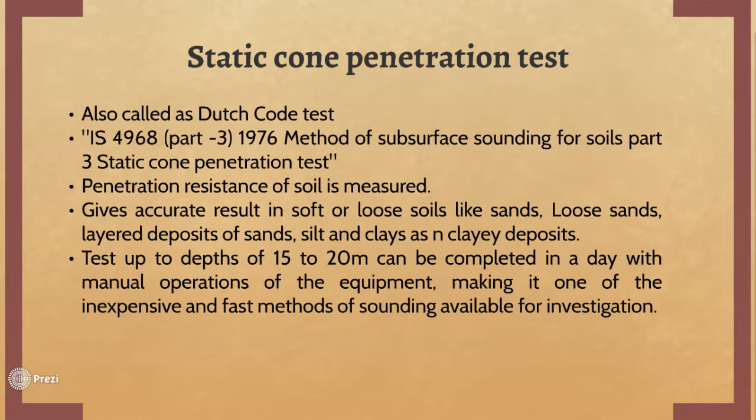The apparatus consists of steel cone, a friction jacket, sounding rod, mantle tube, a driving mechanism like a manual or automatic machine, and measuring equipment to measure soil resistance.

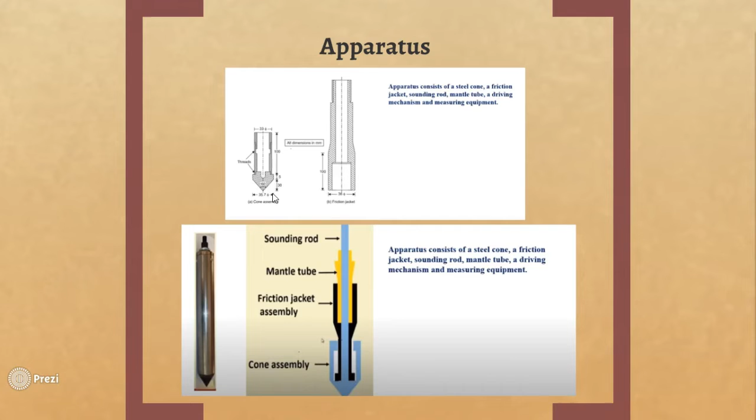The friction jacket shall be high carbon steel. Sounding rod is a steel rod of 15 mm diameter which can be extended with additional rods of 1 meter each in length. As the depth increases, the sounding rod length is increased accordingly. The mantle tube is a steel tube as a means of guidance for the sounding rod which goes through it. It should be 1 meter in length with flush coupling.

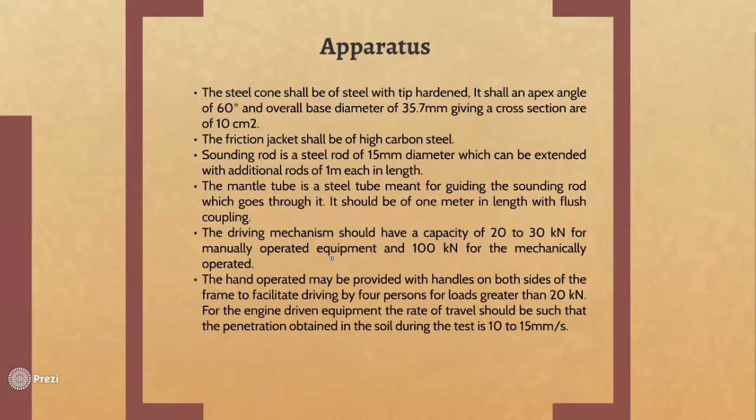Process. The test process for determining the static cone frictional resistance consists of pushing the cone alone through the soil strata to the depth to be tested. Then the cone and friction jacket and finally the entire assembly is pushed, and notice the respective resistance in the first two cases. The process is repeated at predetermined intervals. After reaching the deepest point of the investigation, the entire assembly should be extracted out of the soil.

The result of the test shall be represented as a graph of cone resistance with depth in meters. Small qc is equal to Qc upon Ac.

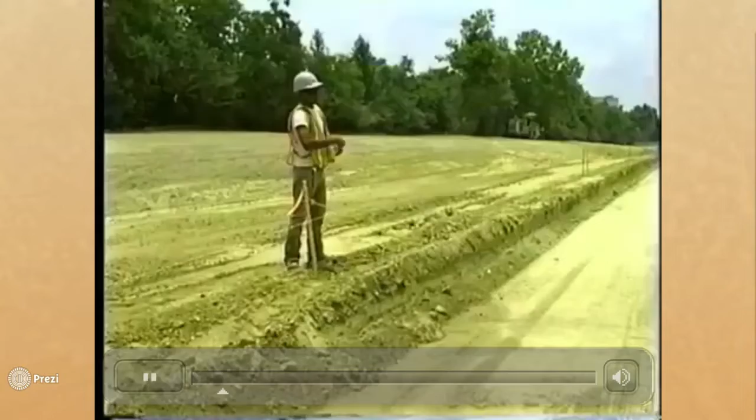Each year, the Louisiana Department of Transportation and Development spends millions of dollars to design, construct, and maintain its highway system. A significant portion of these funds is needed for the foundation systems. All structures, including bridges, pavements, walls, embankments, and buildings, are ultimately supported by the existing terrain. For safety and economy, the design of these structures is based on the properties of the building materials and upon the properties of the foundation materials in the natural ground.

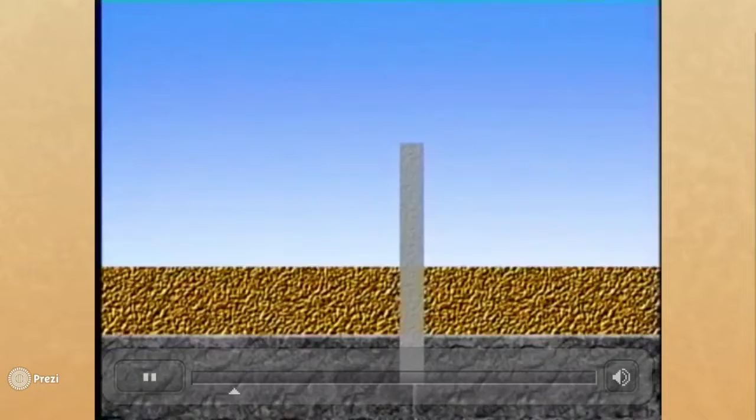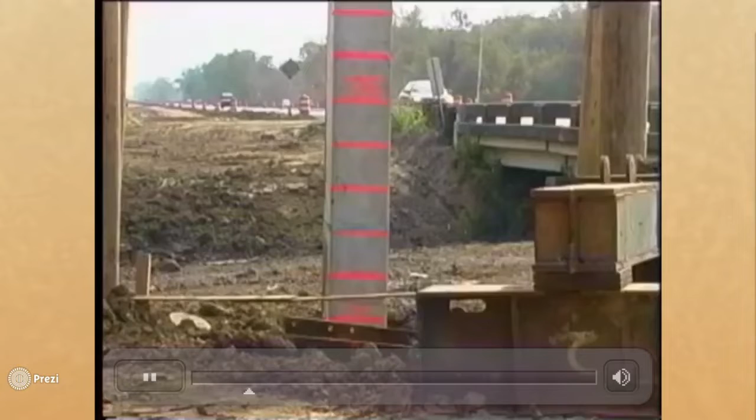Therefore, the designer of these structures must know the surface and subsurface soil conditions in order to create safe and efficient designs. Geological conditions are such in Louisiana that a thorough investigation of subsurface materials is vital to the design engineer. Because dense bearing layers are often encountered well below the ground surface, bridge structures in Louisiana are supported on deep foundations. Piles carry the superstructure loads deep into the ground, either in end bearing or by side friction. The safety and stability of pile supported structures depends on the load carrying capacity of these piles. Current DOTD practice of pile design is based on a static analysis using soil properties obtained from field and laboratory testing.

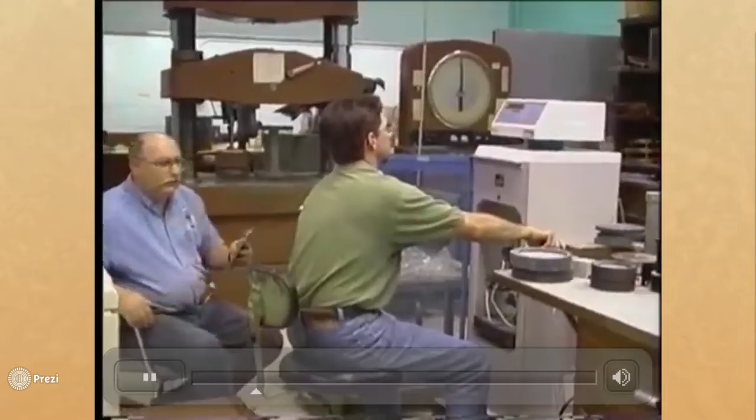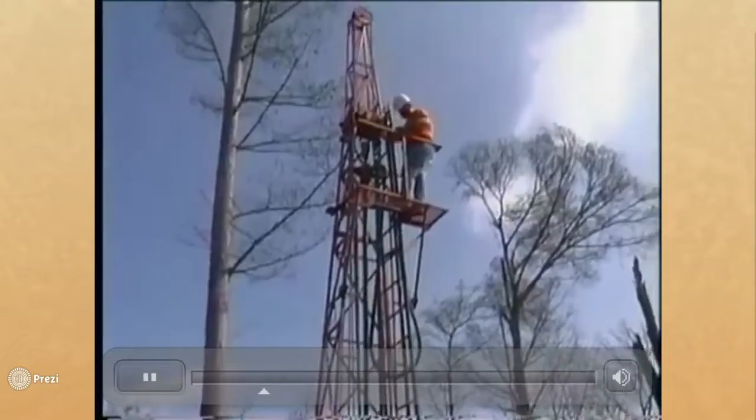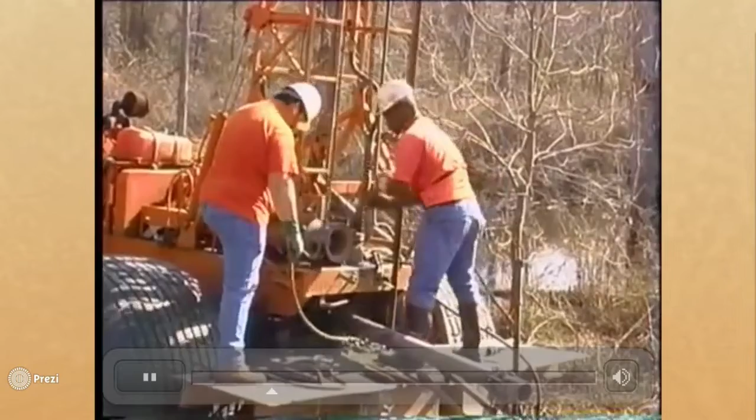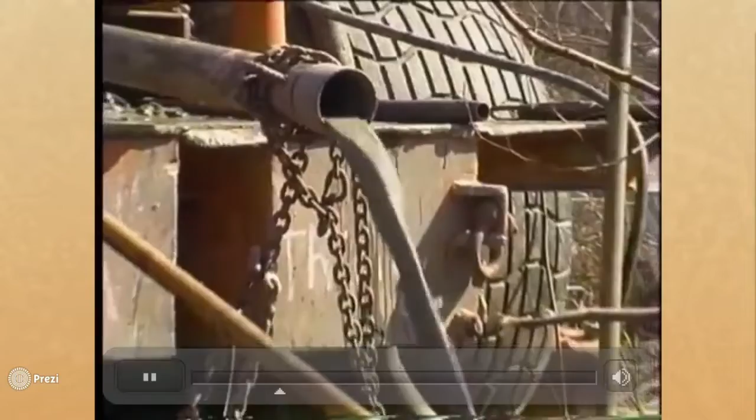Taking deep borings is an expensive, time-consuming process. Obtaining samples for the design of deep foundations involves drilling into the earth to retrieve the soil found at various depths for the purpose of determining its strength properties. To recover undisturbed samples and perform standard penetration soundings, wet rotary drilling equipment is needed. Standard equipment includes a drilling rig, a water truck, a utility truck, and a carryall. Wet drilling is always messy and sometimes hazardous work. Drilling mud is pumped into the hole to provide stability for raising and lowering sampling tools to the required depths. Shelby tubes are used to retrieve undisturbed soil samples. These samples are extracted and carefully packaged for shipment to the laboratory.

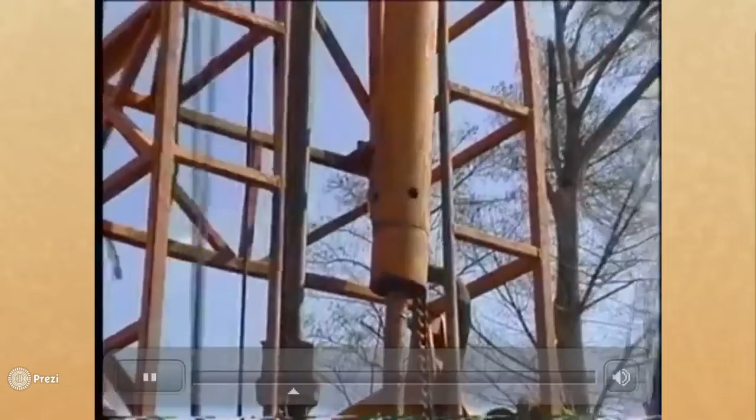When dense materials are encountered, standard penetration tests, or SPTs, are conducted. Penetration soundings involve driving a steel rod into the soil to determine the resistance in blows per foot. Boring logs are manually kept in the field to record depth of sample, visual classification, and SPT or pocket penetrometer strength. Depending on the depth of the exploration, crews are often capable of completing 2 borings per day. Laboratory testing of the soil samples includes soil classification, soil density, Atterberg limits, unconfined compression tests, and triaxial tests.

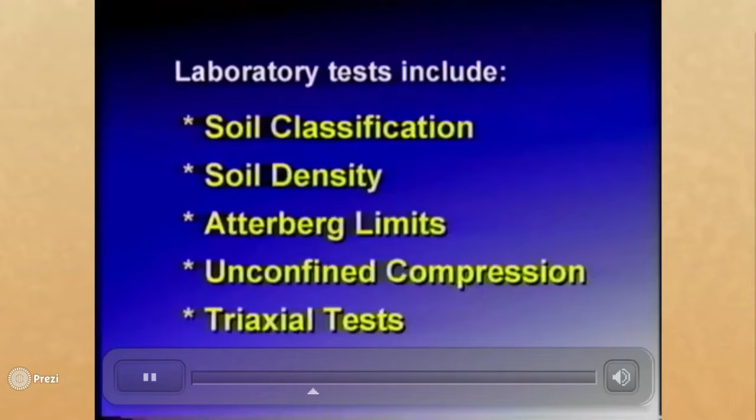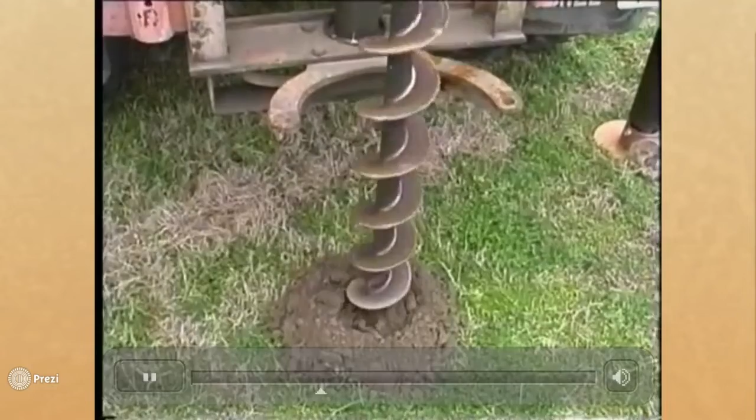DOTD district crews perform the majority of subgrade soil surveys used in the design of pavement structures. Each district operates a boring rig capable of recovering disturbed soil samples. Samples are collected as the auger is advanced into the ground. A drilling log is maintained in the field to record location and depth of sample. Samples are placed in moisture-proof containers for testing in the laboratory. Laboratory testing includes soil classification, Atterberg limits, sieve analysis, and moisture content. Department engineers use the subgrade soil survey produced from these borings for the design of pavements.

Besides subgrade properties, the design and evaluation of pavement structures needs a substantial amount of supporting data such as traffic loading characteristics, environmental conditions, and materials properties of the base and subbase. Currently, empirical correlations developed between field and laboratory material properties are used to obtain subgrade performance characteristics. These correlations do not satisfy the design and analysis requirements because they do not address all possible failure mechanisms in the field. Most of the subgrade properties used in the correlations do not represent the strength conditions of the subgrade, environmental variability, or the repeated traffic loading on the pavement.

Because of the considerable time and expense associated with conventional exploration operations, there is a need for more rapid and accurate site characterization techniques. The Louisiana Department of Transportation and Development and the Louisiana Transportation Research Center operate 2 types of electronic cone penetration systems.

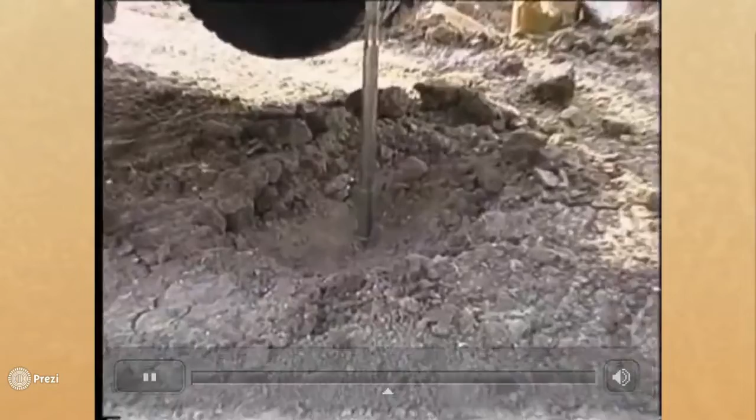The cone penetration test, or CPT, essentially consists of pushing an electronic probe into the soil at a rate of 2 centimeters per second. The device is equipped with a load cell at the tip to measure resistance offered by the soil during intrusion. It is also equipped with a friction sleeve to measure the local friction between the surrounding soil and the shaft of the probe. The CPT tip resistance and sleeve friction data can be used to determine soil types along with a variety of engineering soil properties.

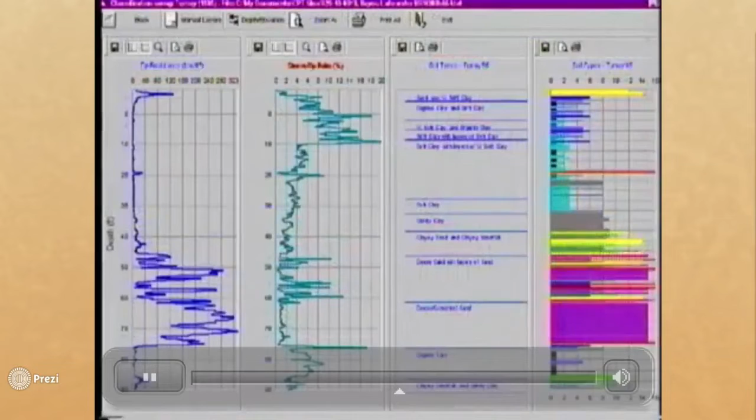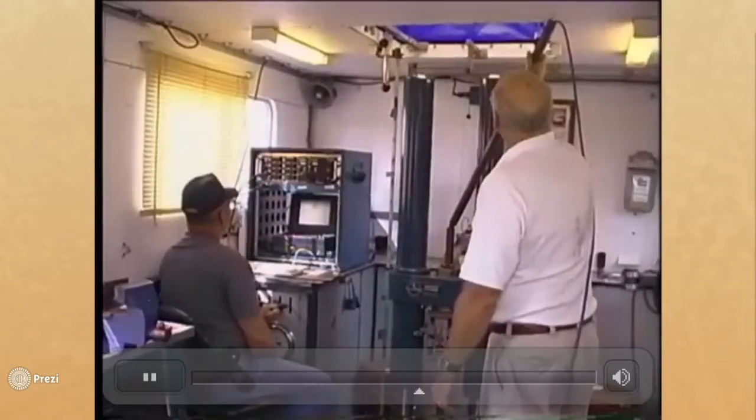Both DOTD and LTRC operate large cone trucks with reaction capacities of 20 tons. These trucks are used to gather soils information as deep as 200 feet. Besides the standard 10-square-centimeter cone and a larger 15-square-centimeter cone, other cones available measure pore pressure and electrical resistivity. A cable that is threaded through the push rods transmits the information. A hydraulic ram pushes the probe into the ground at an average speed of about 1 meter per minute.

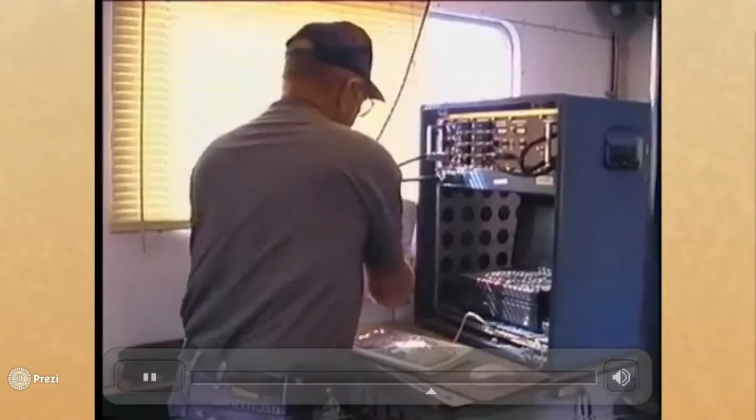Up to 200 meters of penetration soundings can easily be made with this equipment in 1 day, 7 times faster than conventional drilling. Readings, taken every 2 centimeters, are viewed by the operator in real time on the computer screen. Results are available immediately and can be stored in the computer or saved on a disk for use at a later time by design engineers.

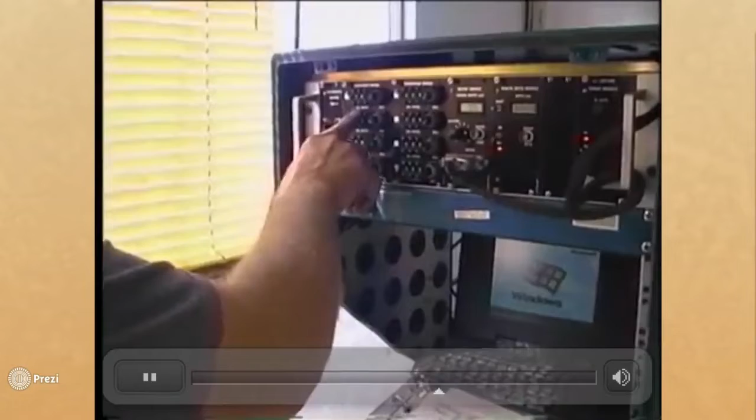The cone penetration test, or CPT, has been used to set pile lengths on many DOTD projects since the 1980s. On the vast majority of projects, CPT technology has been limited to identifying dense sand layers required to support end-bearing piles. The CPT soundings have traditionally been taken during the construction phase to supplement a full complement of borings already in the plans.

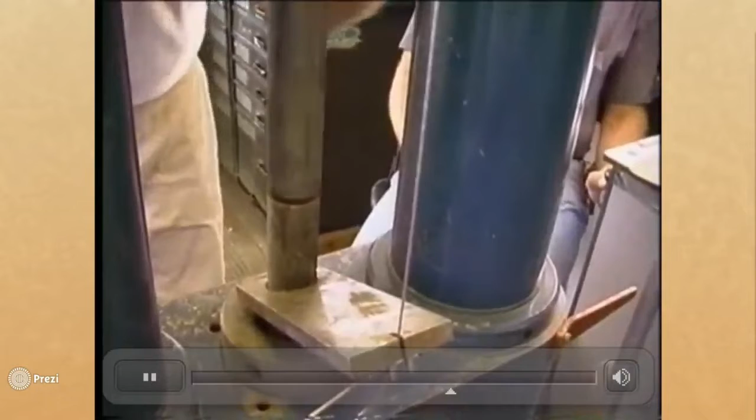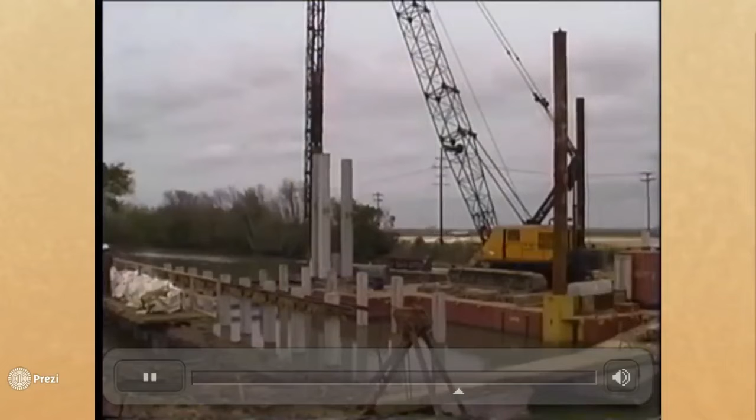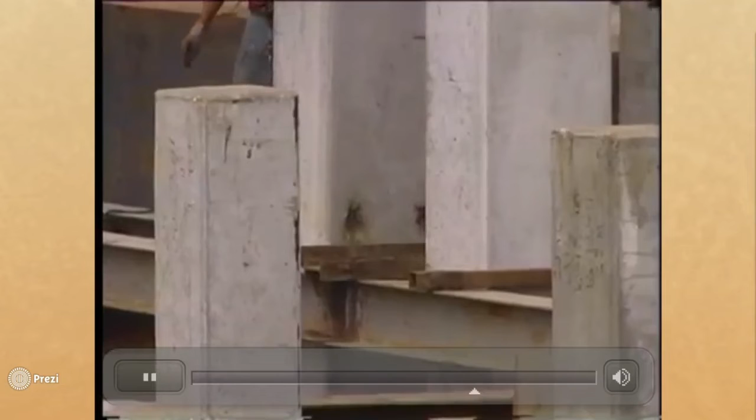Results of the LTRC study, Evaluation of Bearing Capacity of Piles from Cone Penetration Test Data, has demonstrated the capability of CPT methods in predicting the ultimate load carrying capacity of square PPC piles driven into Louisiana soils. A Windows-based computer program has been developed for pile load capacity prediction with CPT data. This now allows DOTD engineers to use CPT technology to set lengths for both end-bearing piles and friction piles. Utilization of the CPT during the design phase can drastically decrease the number of soil borings and reduce the cost and time required for subsurface characterization.

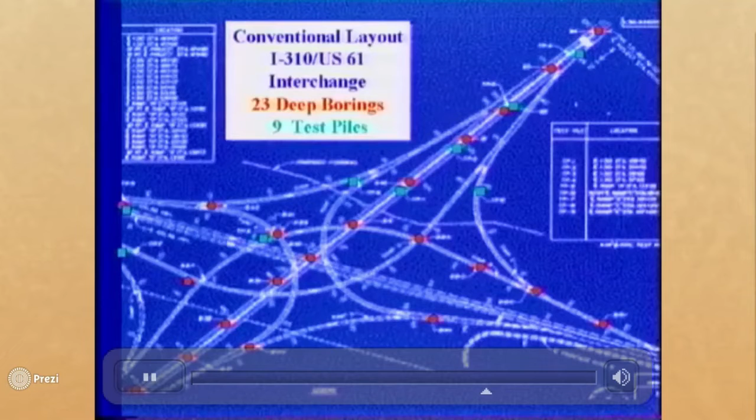It is well documented that CPT data can be obtained faster with less cost than conventional soil boring data. CPT soundings taken at closer intervals than traditional borings will provide more details on soil stratification and therefore less potential for error. Using CPT data can reduce the number of borings required, and correlation with the test pile can provide more accurate pile lengths for additional savings.

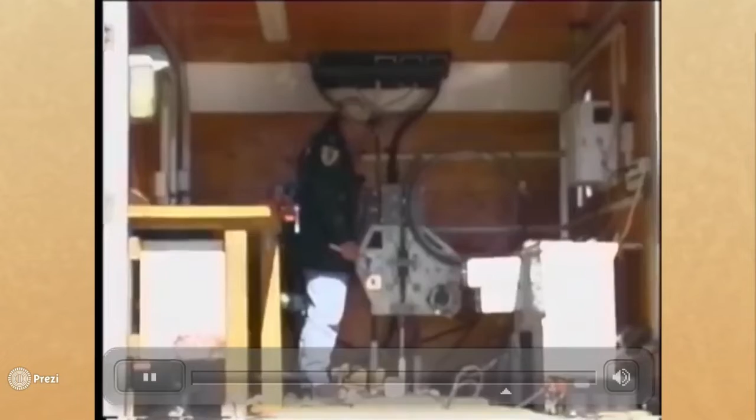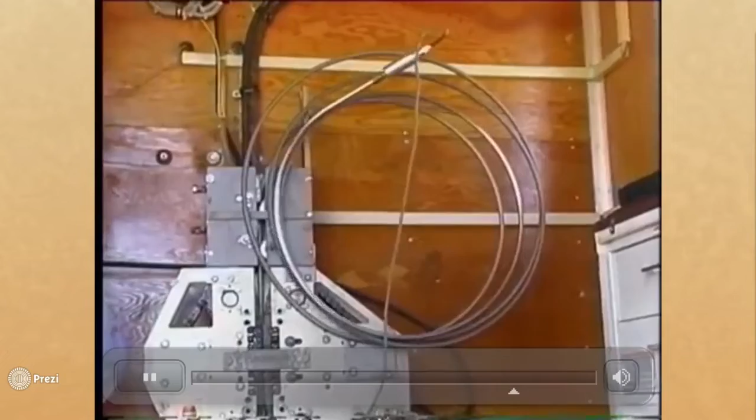LTRC has recently miniaturized and adapted this proven CPT technology for highway subgrade characterization and pavement design. A continuous intrusion miniature cone penetrometer has been implemented in a four-wheel drive vehicle. The vehicle provides for the leveling and gross weight needed to react during cone penetration. A novel feature of this new in-situ testing vehicle is a Caterpillar-type continuous push device. It is powered by a hydraulic motor for advancing the cone penetrometer.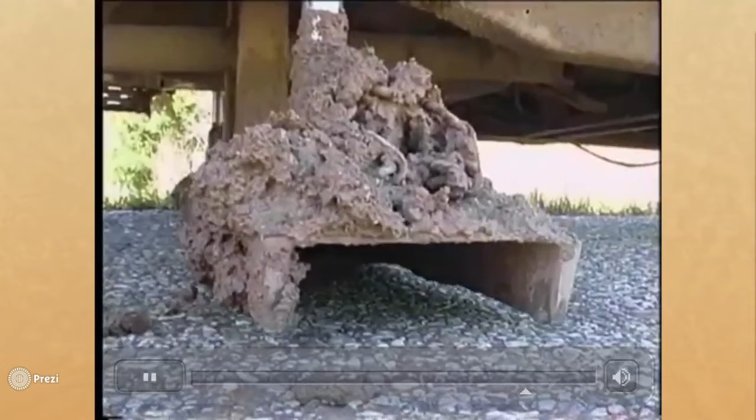The cone rod is a 1/2 inch diameter stainless steel coil tube. The coiling thrust rod eliminates the need for threaded connections. It has a 2 centimeter electronic cone penetrometer attached to one end and a cable connector at the other. This one-man operation greatly increases productivity and serviceability. The system may be used to test on natural ground, beneath existing pavement through an access hole, and even on side slopes. To provide greater mobility and site accessibility, the system can also be mounted on smaller four-wheel drive or tracked vehicles. A laptop computer is used for data acquisition, processing, and analysis.

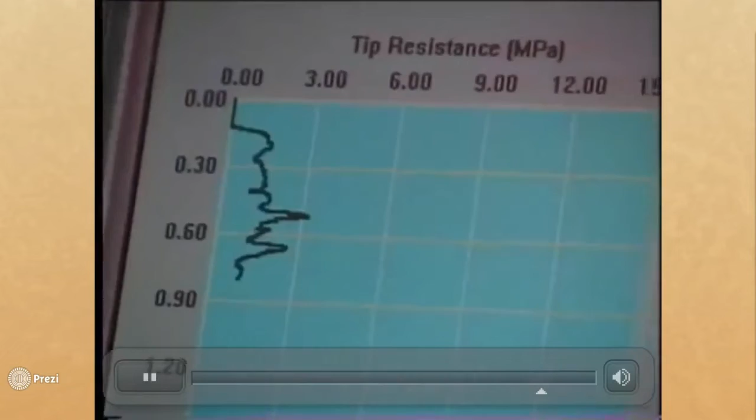The computer is equipped with interface modules that convert analog input signals to engineering units. As with the larger cones, the mini cone can be used to provide a variety of soil properties. The mini cone equipment has been implemented on several DOTD projects for the identification of soft subgrades, slope stability analysis, and pavement design.

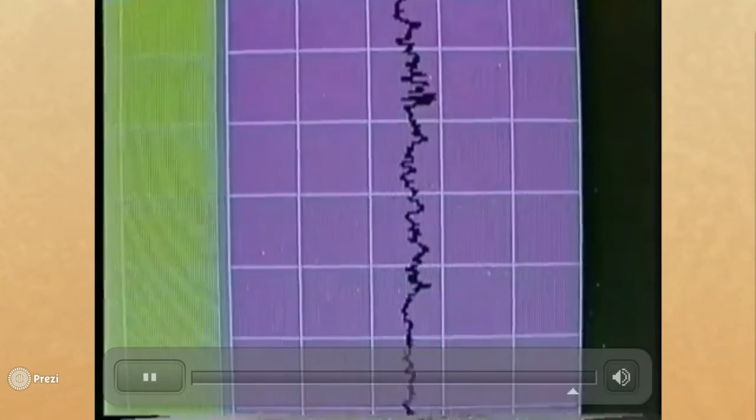The LTRC research project, Investigation of the Applicability of Intrusion Technology to Estimate the Resilient Modulus of Subgrade Soil, has developed a prediction model to estimate the resilient modulus property needed for pavement design. The prediction model correlates the resilient modulus to the cone penetration test parameters, basic soil properties, and in situ stress conditions of the soil. LTRC is continuing efforts to validate the prediction models. More durable, cost-effective pavements can be obtained by inputting more accurate resilient modulus values into the pavement designs. Compared to conventional boring, sampling, and laboratory testing methods, CPT technology provides a reliable, economical, and time-saving tool for site characterization.